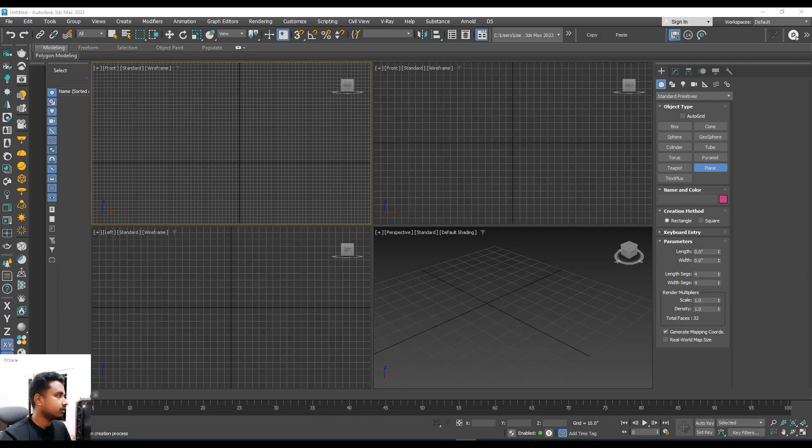How to model this furniture in very short time.

So let's get started. First of all, make a plane. For the reference, go to the reference image and just drag and drop over this plane. Then make it adjust like this. Then it's very important to convert this plane into a real scale.

Maybe your furniture height is 8 feet, so create a rectangle in 8 feet, or you can model this furniture in metric units, so convert this value into metric, mm, cm, or meter. You can do that. I'll go for inch, fps unit. So make it 8 feet, depth is width, and width is 14 inch.

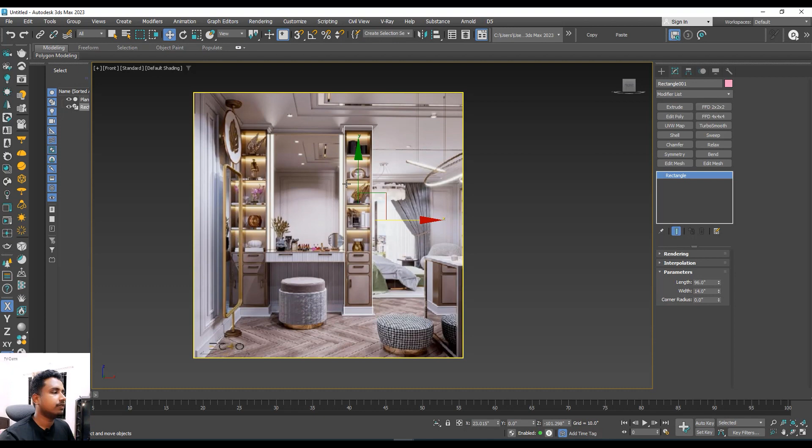And then adjust your plane according to this rectangle. It's very easy, right? Then apply extrude modifier over this rectangle. This value is 14 inch, that's okay. P for perspective, Z for zoom.

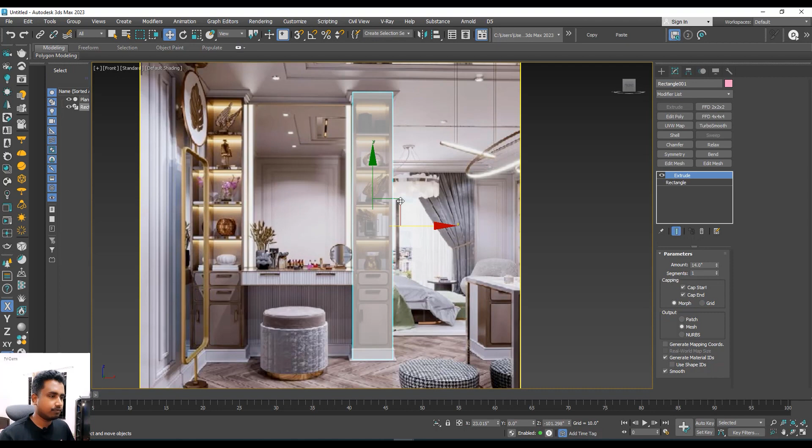Now hold Alt and X, and you will get the transparent mode of this geometry. F for front, and then apply edit poly. You can also apply editable poly, but I prefer edit poly first because you can easily undo if you make any mistake in your model.

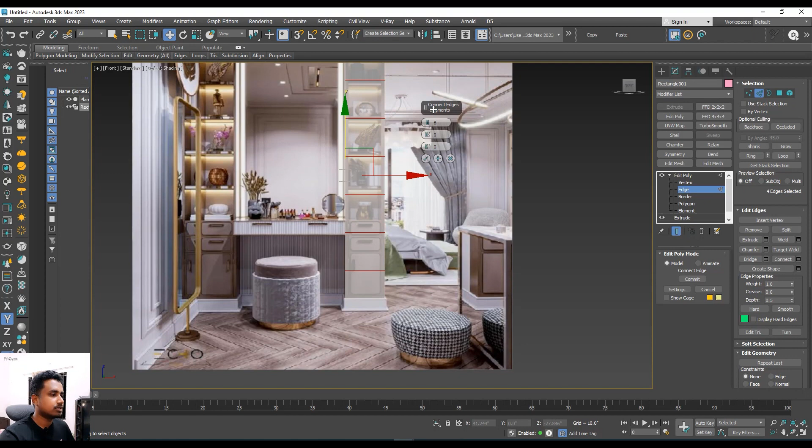Select edges, and here is 1 2 3 4 5 shelf, so you need to connect 5 or 6 connected, and then you will get the 5 segments, and then adjust here and here.

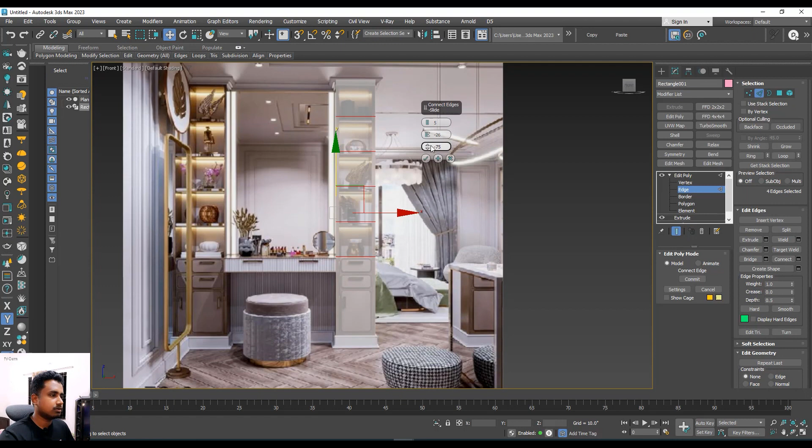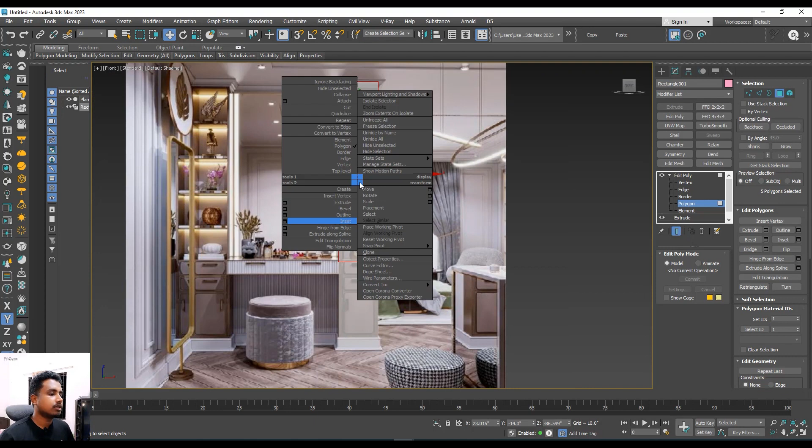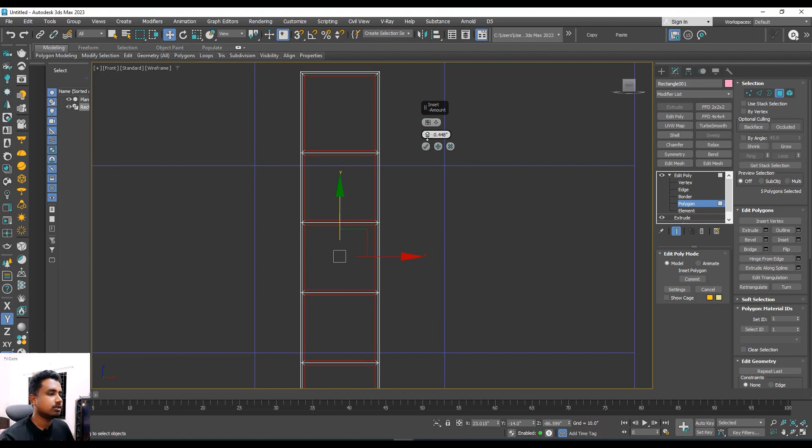Adjust like this. Go to polygon, click F2, and in this way you can get full transparent face. Select full polygon and then inset. First inset for my total border, and another inset for individual shelf. Make sure this is by polygon. F3 to see the proper thickness of your shelf.

This part is 2 drawers and 1 pallet storage. So another edge, connect, make it 1 and increase the segments, like this.

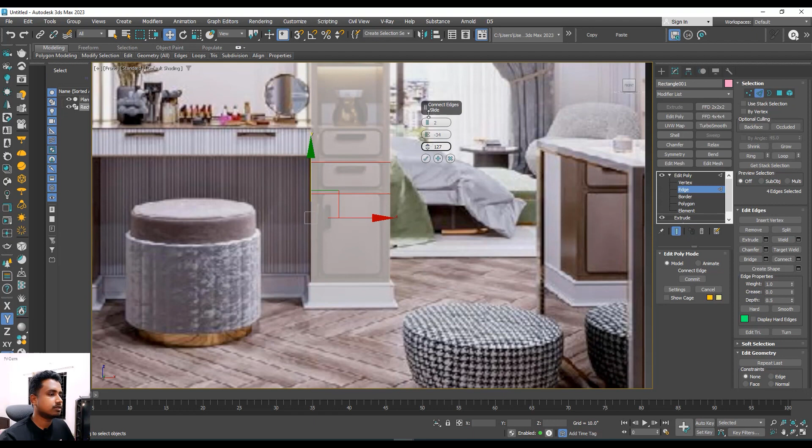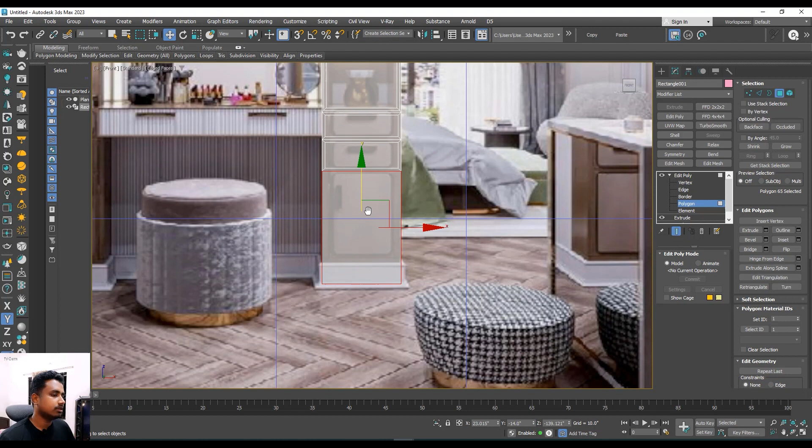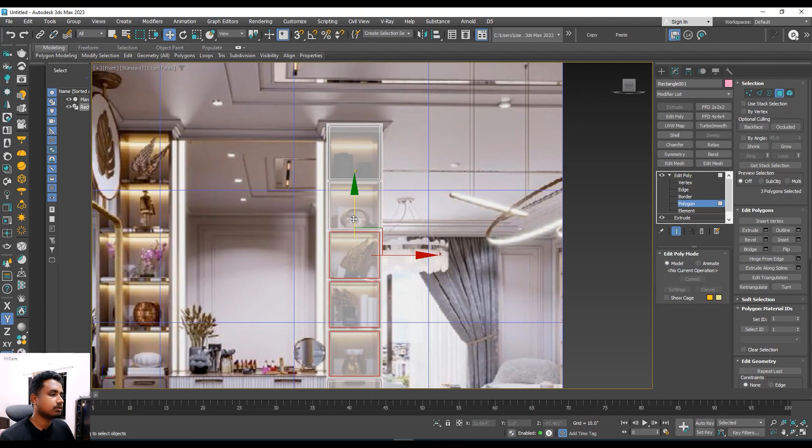F4 for showing the edges. Here is 2 drawers, inset it, this is the drawer part, and then this is another part. So connect, insert over here. Then adjust this by selecting vertex, then select the polygon for this shelf, and hold shift and drag in negative way. Then this part, select the polygon.

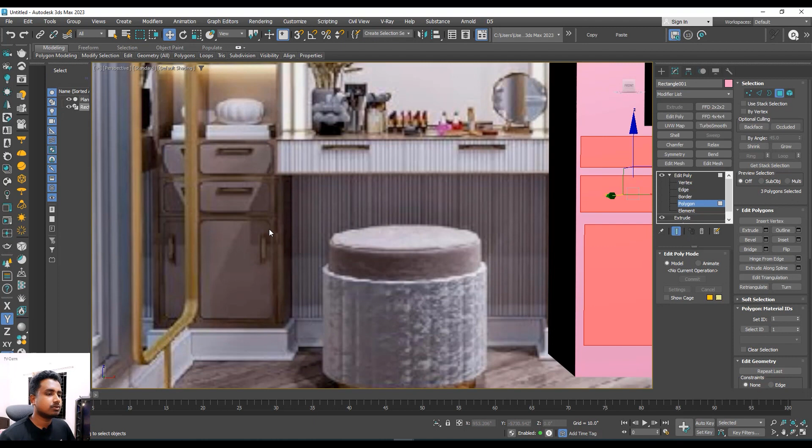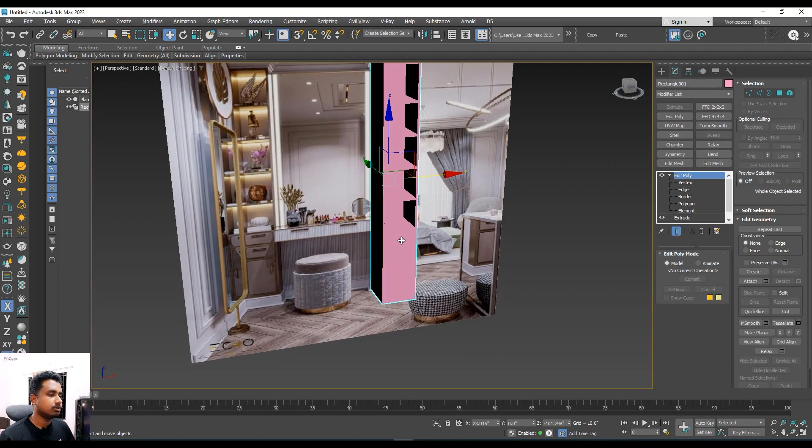And this you can see the round shape. So this is not the total part, this is maybe another bit over here. So we can create it later. First of all, focus on your basic structure. Make it punch like this, and then hold Control Shift and drag like this.

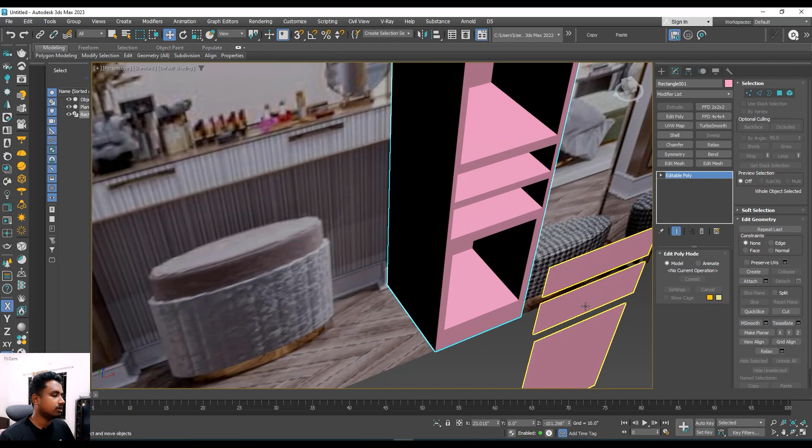Then you will get another face. Make it clone to object, and use shell modifier to give it thickness. Then affect pivot only, center to object, modify, adjust over here.

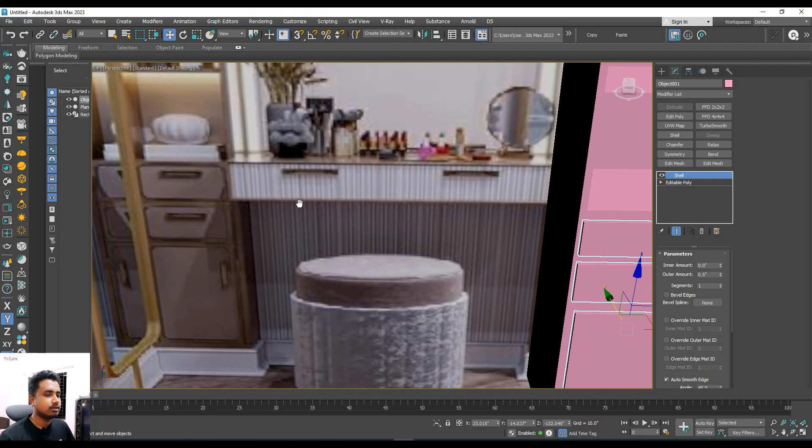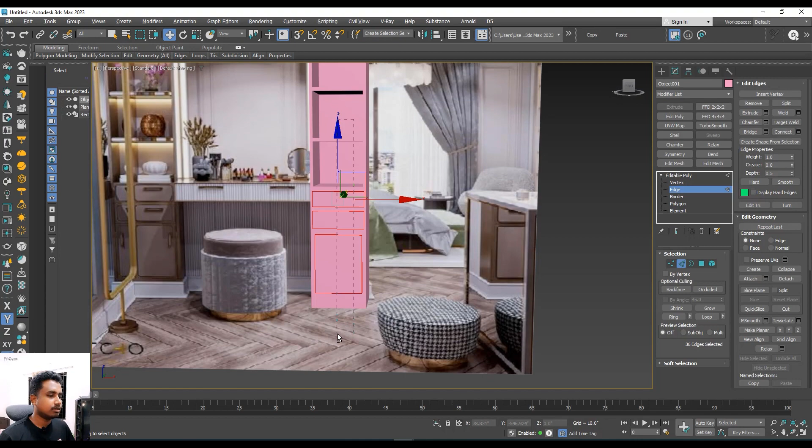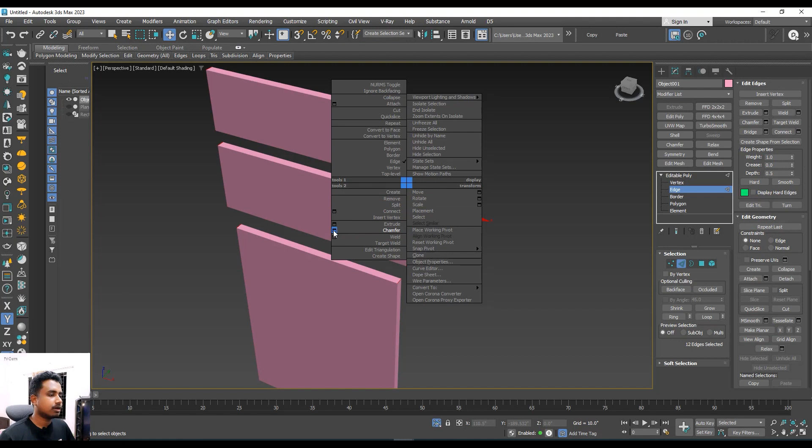Then you can get this kind of shape in a very simple way. Just convert to editable poly, select the edges, this edge, select all side edges, this side and this side, and exclude the middle edges by drag and hold Alt. At the same time exclude the middle part. Just select the corner edges in your drawer and shelf, then left click chamfer, increase some values like this, increase some value, increase some segments. In that way you get a shape like this. Very simple, right?

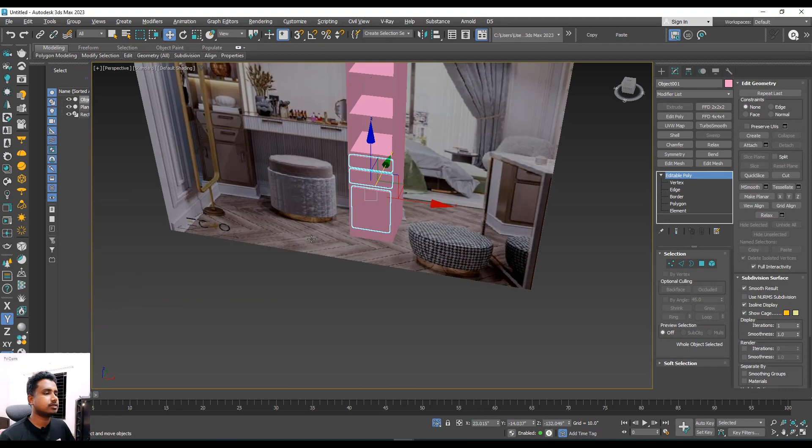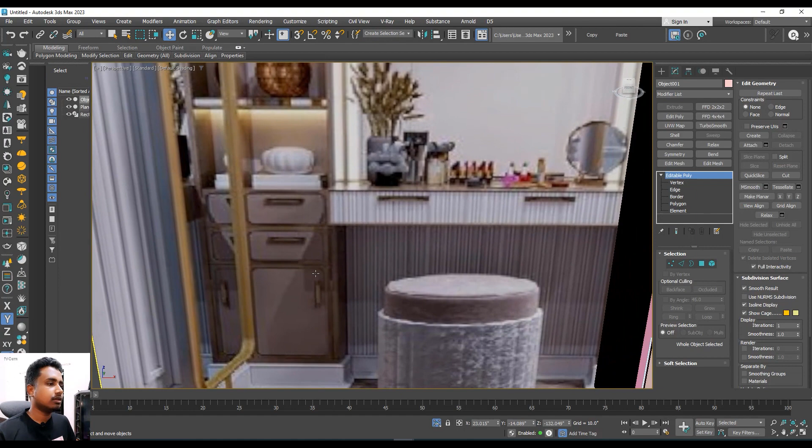So adjust over here, maybe set another color to show it properly. Here you can see in the reference that there is a golden bead over this shelf. So how to create this?

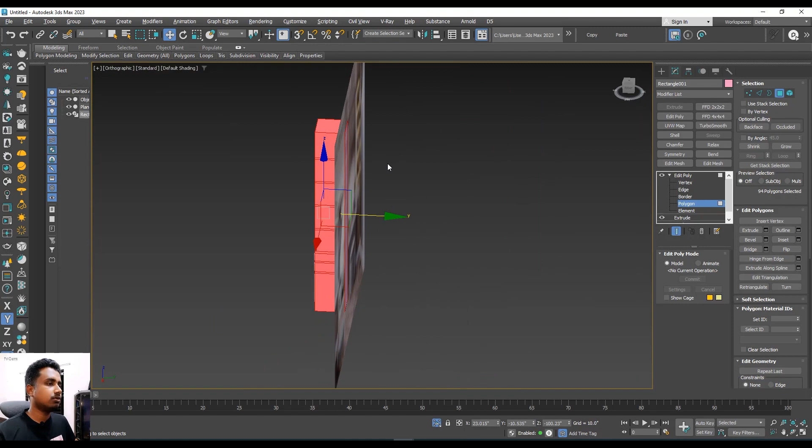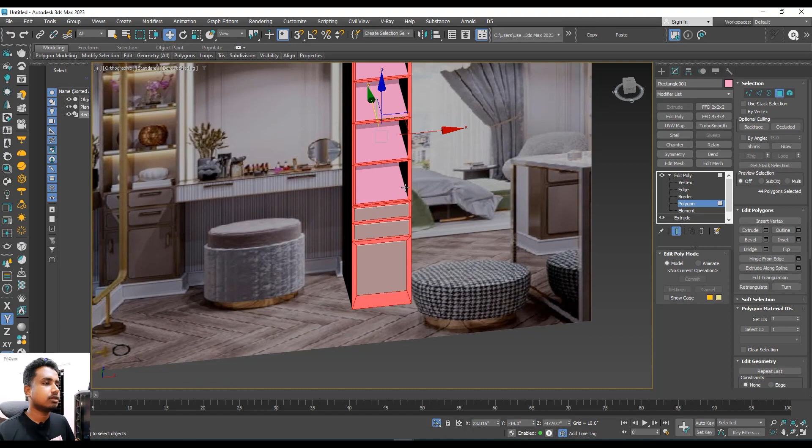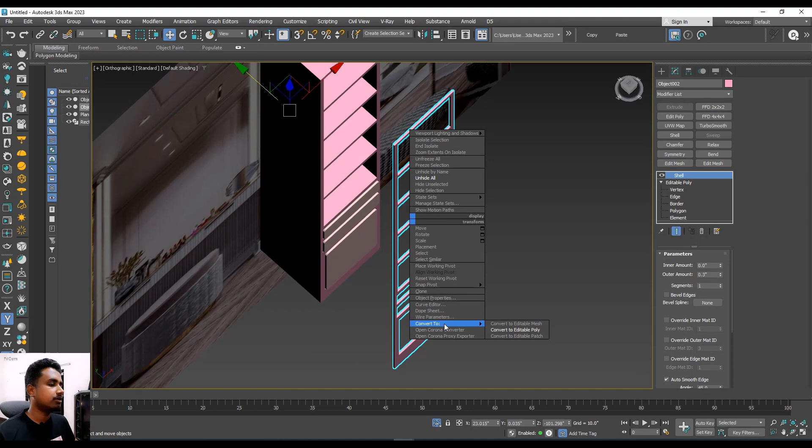Select just the polygon, select it from front, it will be easier, and then exclude this face or this poly. Look, this bead, this golden bead, is just pasted in front of the shelf part. Select that, and then hold Ctrl and Shift and drag in front. In that case you are able to create clone to object. Make it some renderable, go to shell modifier, give some amount, convert to editable poly, affect pivot only, center to object, and paste over here, and that will be our golden bead.

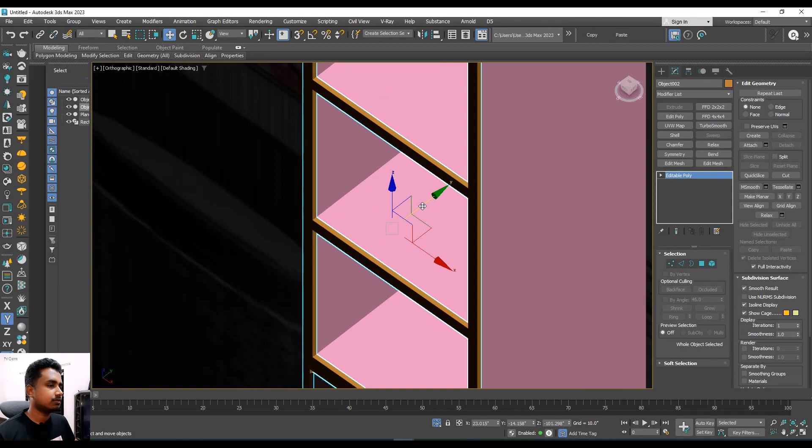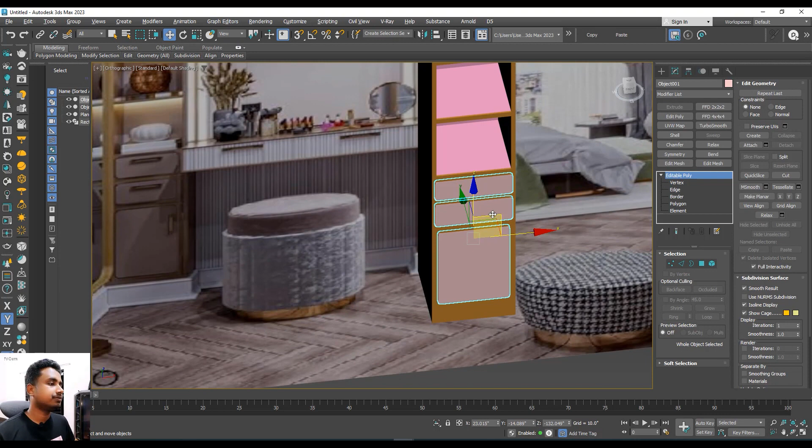Select another color for now, and that will have another shapes in the golden part. So how to create this? Alt Q to hide all except this.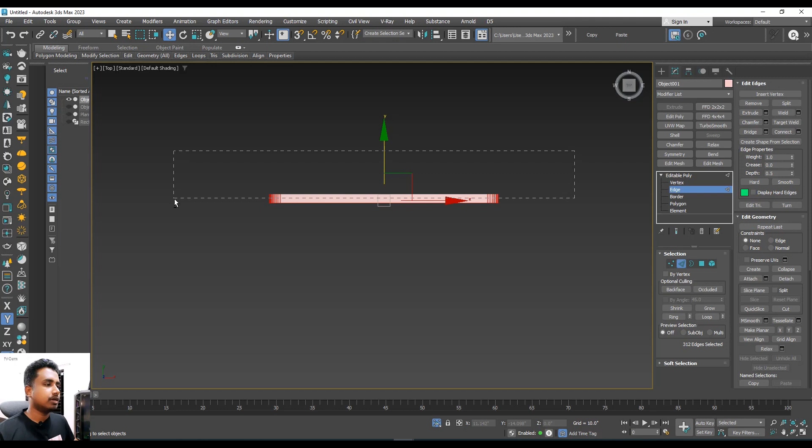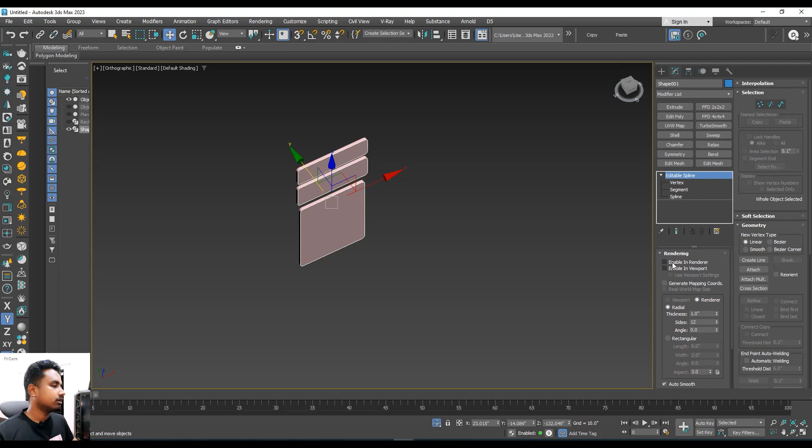Select the edges, go to the top view, select the edges in front and exclude the back edges. Left click, create shape and linear. Then you will get a spline shape from here, and you need to make it renderable. Go to spline, select spline, go to rendering, enable in render, enable in viewport. Decrease some values, unhide all now, and make it golden. Assign the golden-like material. Done. You are able to do the same.

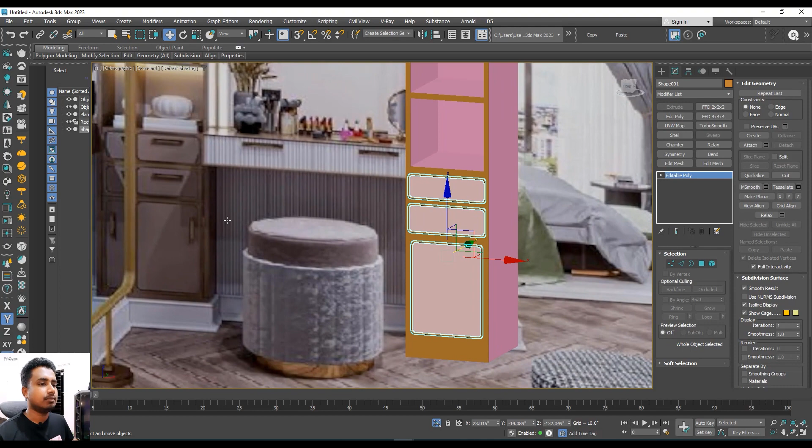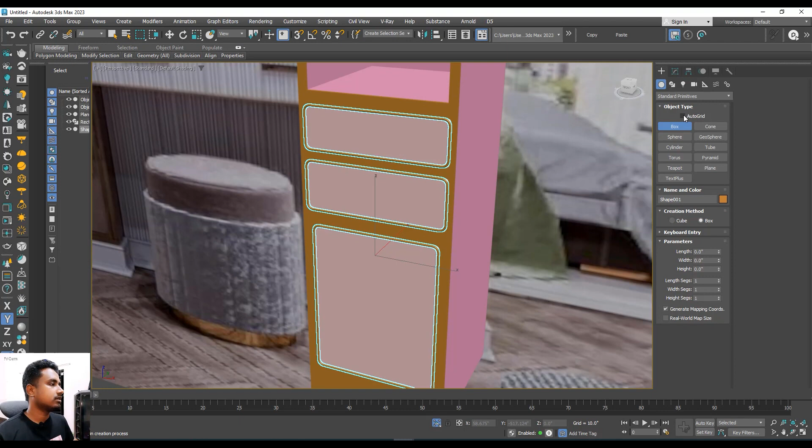So here is the handle. How to create this handle? Maybe you can create it from a rectangle or from a box. So how to create a box over this surface? Activate auto grid and then just drag and give some height.

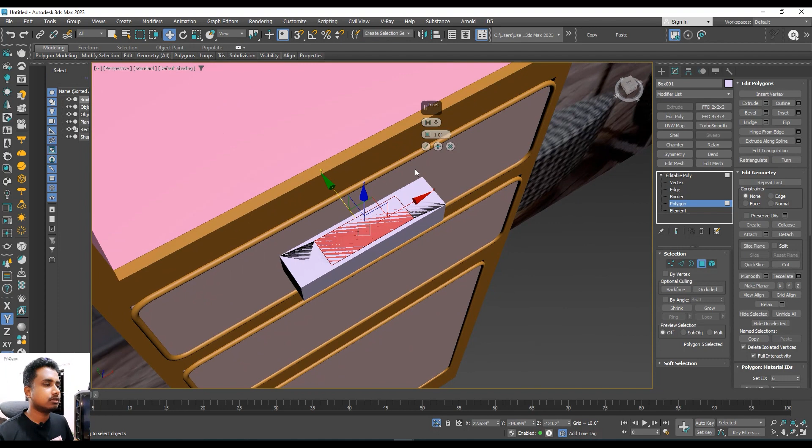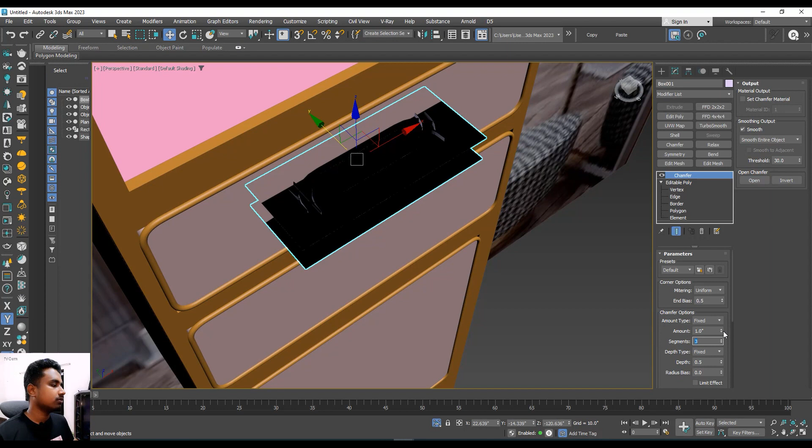Make it convert to editable poly or edit poly, then select the polygon, inset like this, and then punch it, and use chamfer, increase the amount, increase the segment 2 or 3, not much more, and then decrease the amount. Then you will get a smooth handle like this.

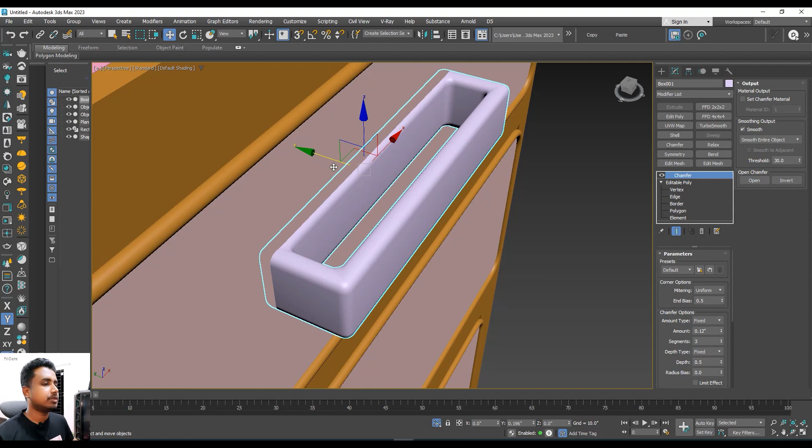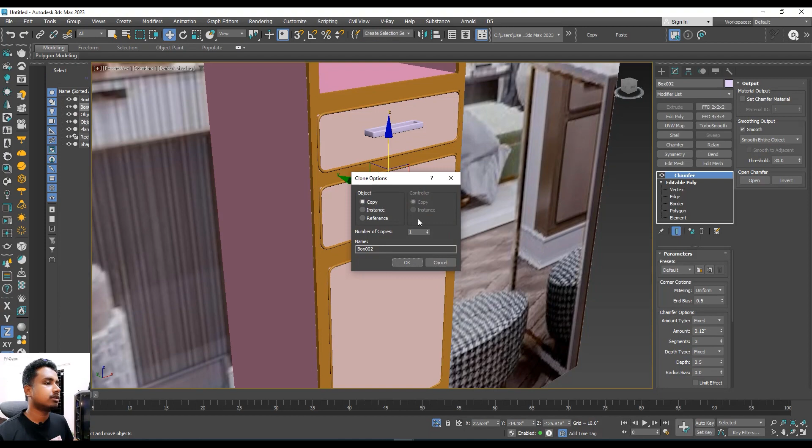Okay, that will be our drawer handle. Just paste it here and decrease some value by using resize. Then instance it in another drawer, and another.

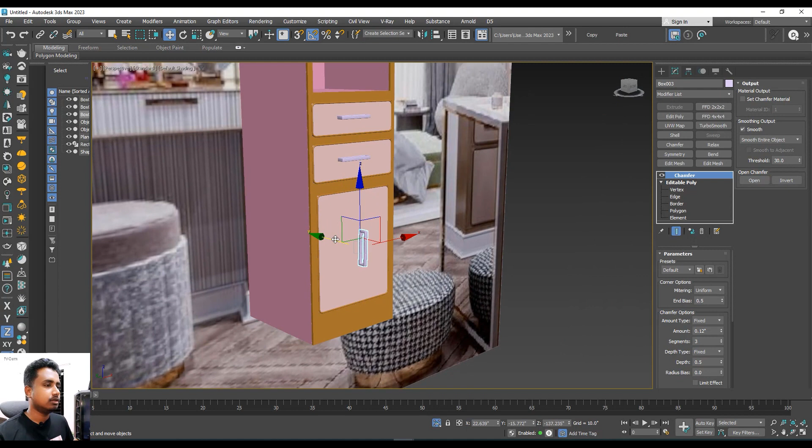This part will be placed in a vertical way, so rotate it, and then adjust in this part. Okay, so this part is almost ready.

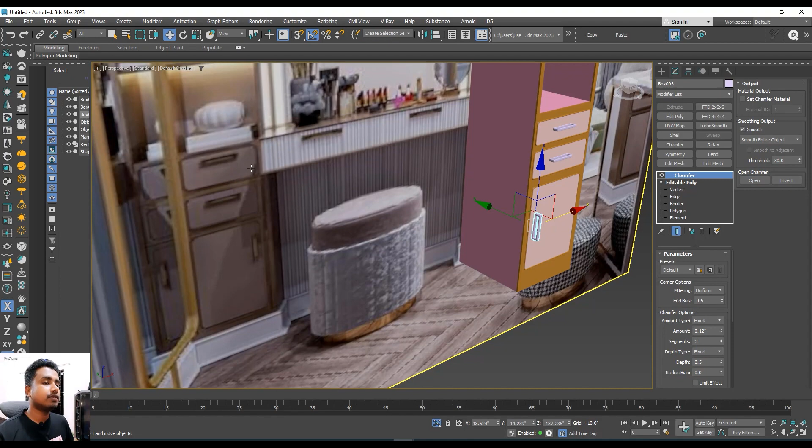As you can see in this image, this drawer has some offset up from this surface. So you can do the same in a very simple way, just up a little bit. Okay.

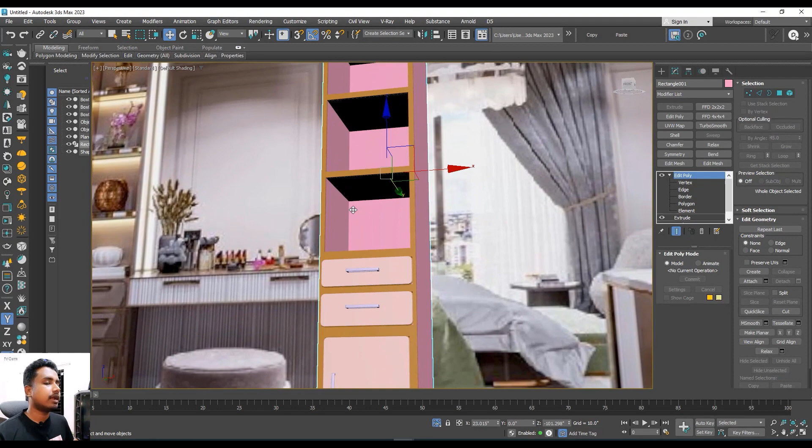Then you can add light over here. Maybe you can add light for light material, or you can use Corona light or Vray light. So maybe we'll adjust light later after completing the full modeling.

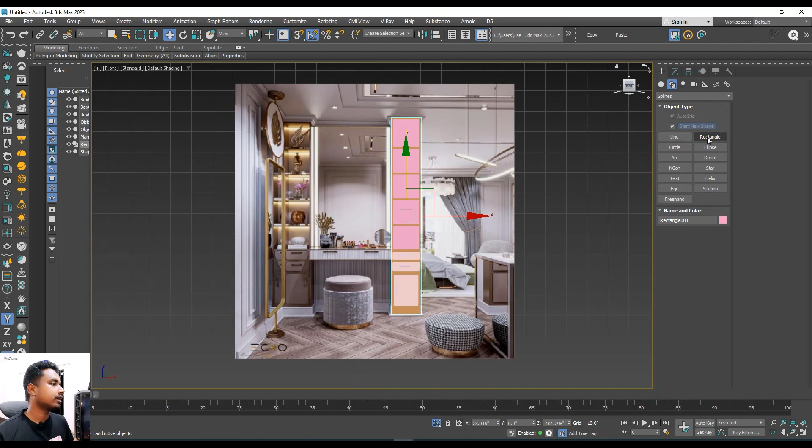So then I'll go for the middle part of this furniture. Again create a rectangle for this mirror part, another rectangle for the bottom part, and then another rectangle for this drawer. Okay.

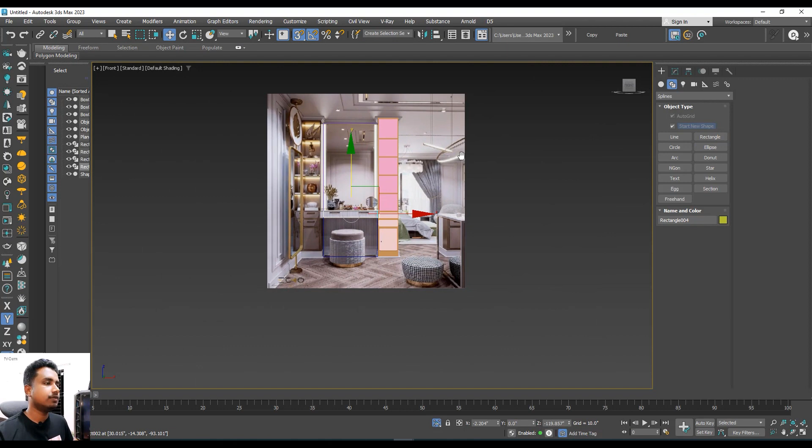Press G to hide the grid, hide the reference for now, and then adjust this rectangle. So you can see the rectangle has thickness enable or enabled, maybe active the enable render and enable viewport. That's why this rectangle is showing like this.

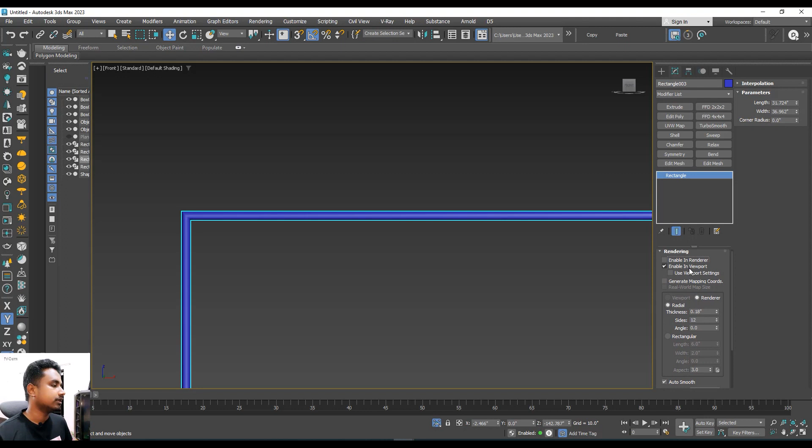So deactivate the enable in render, enable in viewport. Okay. Again do the same, then adjust like this.

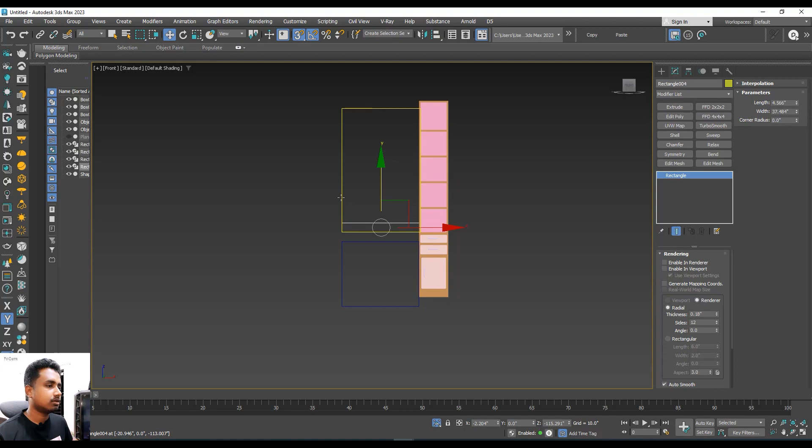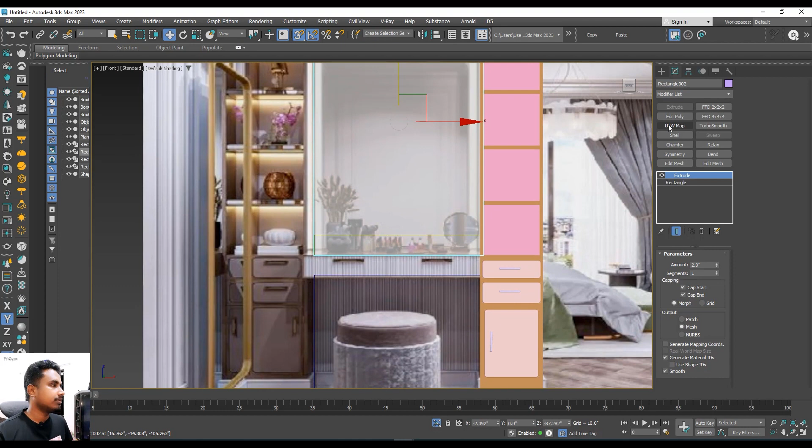So you can extrude it and see the back part. Alt X. This is very low thickness, so give maybe 2 or 3 inches. 2 inches is okay. And then go to the front view. So make it edit poly to adjust for final modeling.

Select vertex and adjust over here. Then do the same in the lower part. Extrude, and make it extrude in the middle drawer part. Extrude. Okay.

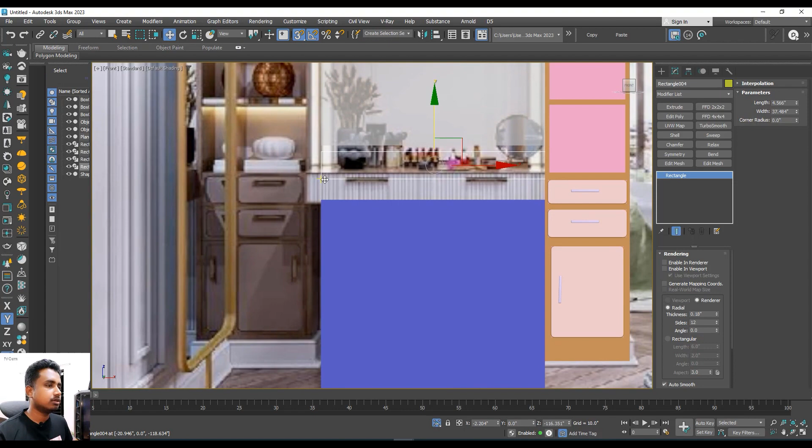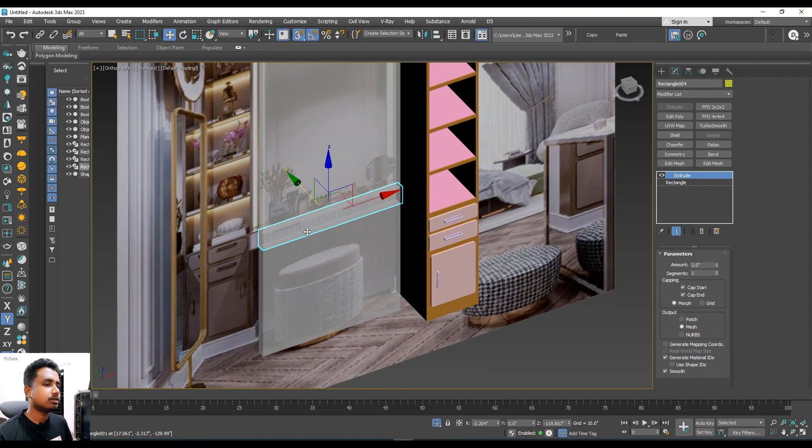So Alt X so that you can see through this object. Here select vertex, adjust over here, and this whole drawer part, this has more thickness around this part. So go to extrude and make it 14, or sorry, make it 14. Okay.

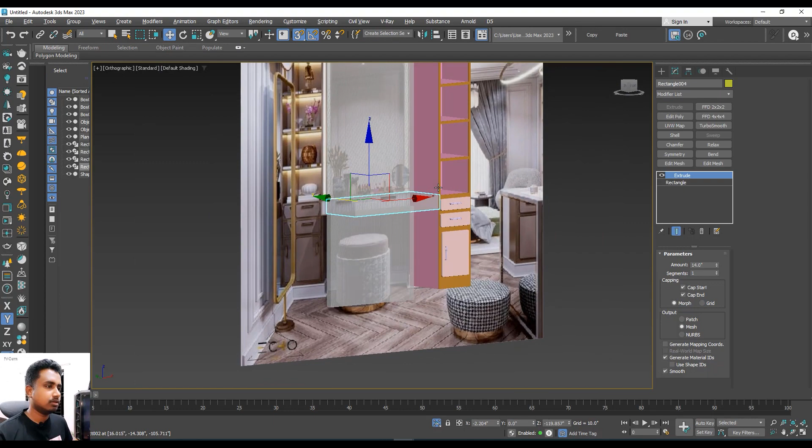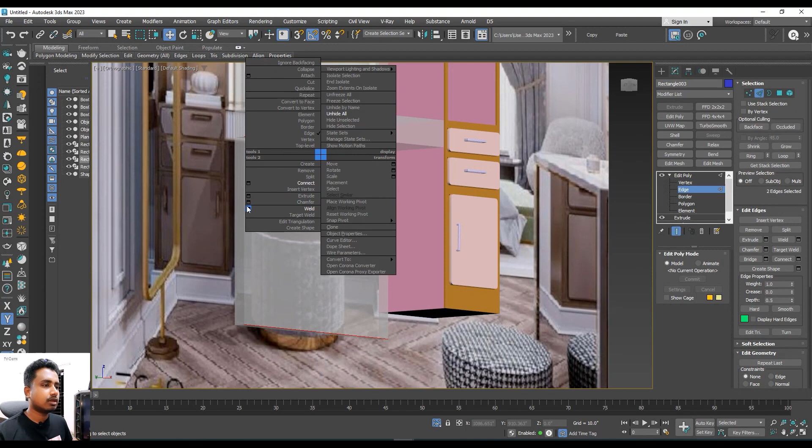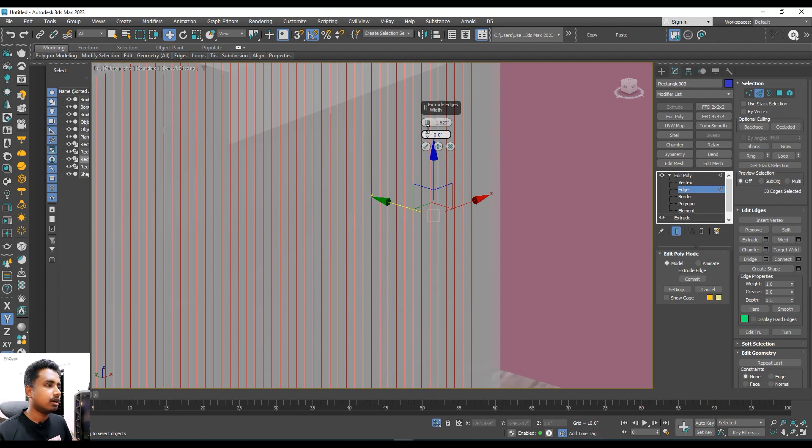And this part, if you see, needs to look like a louver, or needs some groove added over here. So that is very easy. Edit poly, select edges, select this edge and this edge, then connect, increase the connection values, and then make it extrude. So how much extrude you need and how much cutting depth. You need to extrude it in a negative way so that you can create a proper groove over here. Okay, like this.

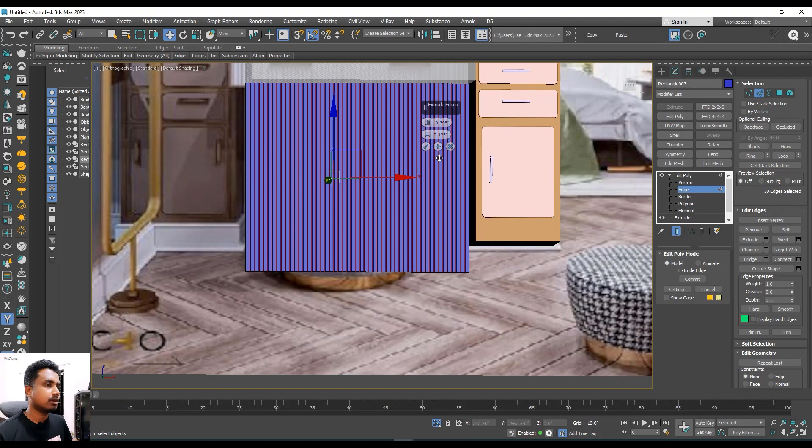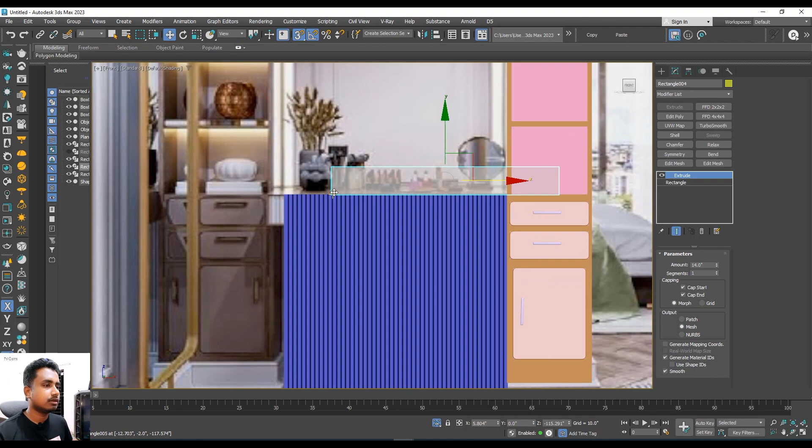You can copy this thing here, copy, and then paste in front of this drawer. No need for another groove, just make it in a very simple way. You can save your time so much.

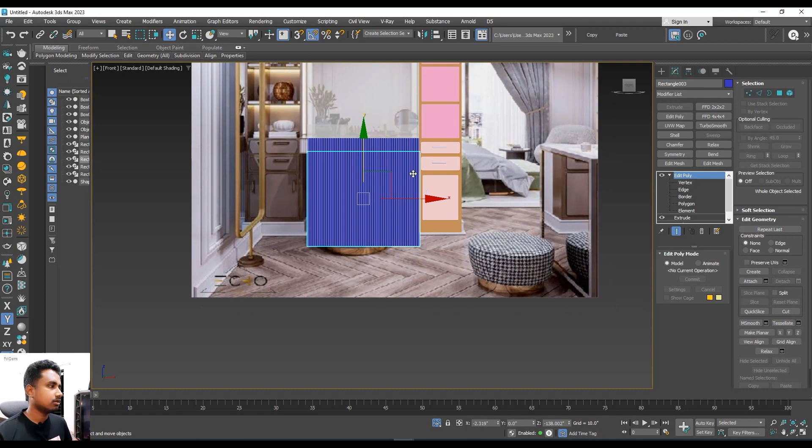Unhide all. So here is the mirror part, here is the drawer part, but you need to paste it in front of this drawer.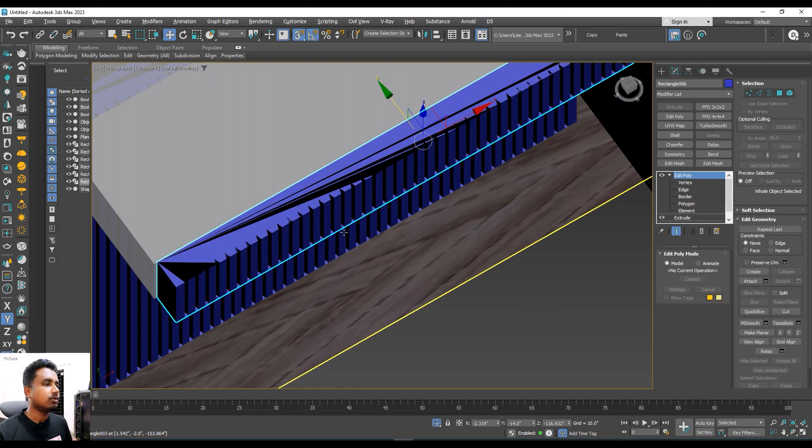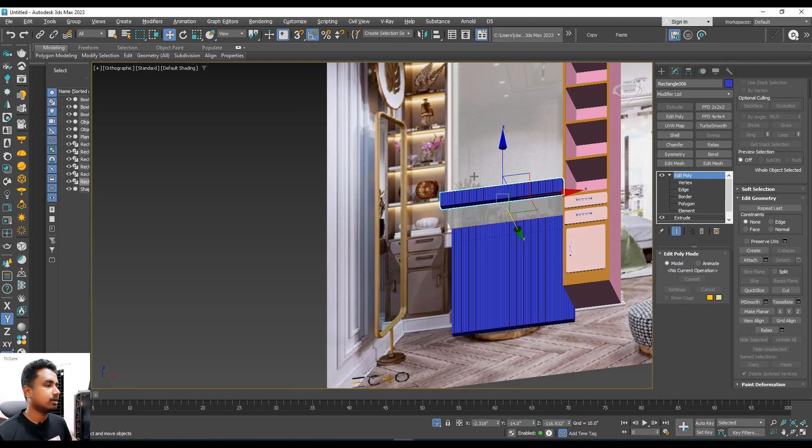As you can see here, it looks very bad, some black lines are here, no worries. Select the element and go to polygon smooth group here, click clear all, and boom, you can see everything is clear. Okay, so give a color over here, maybe white for now.

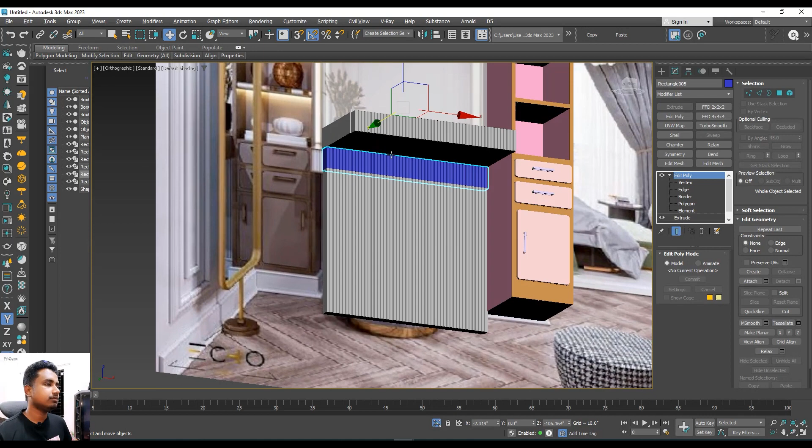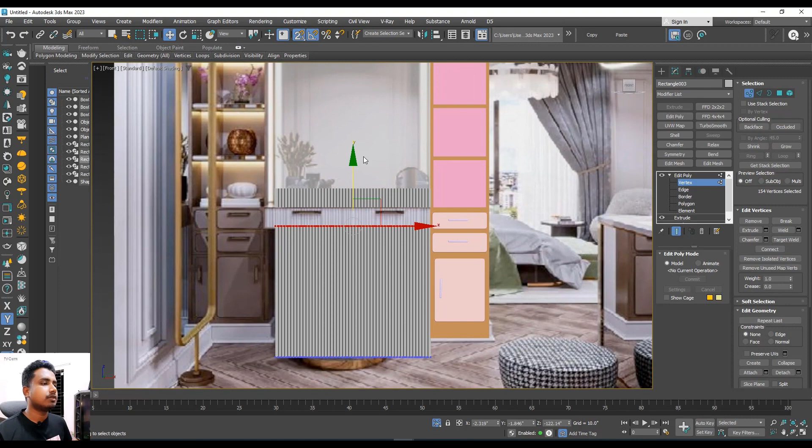So if you work in 2D view, you need to activate 2.5 snap, then adjust.

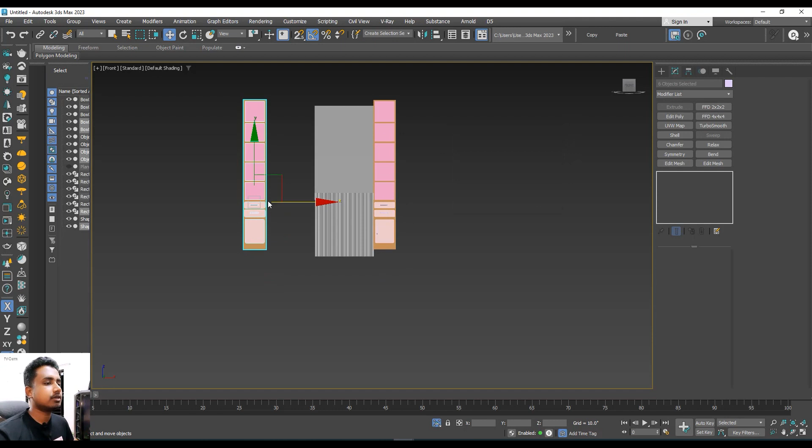No need to copy, don't copy. This is a symmetrical design, this part and this part are the same, so make it instance so that you can change one part and the other part changes at the same time. So make it instance, and then place over here.

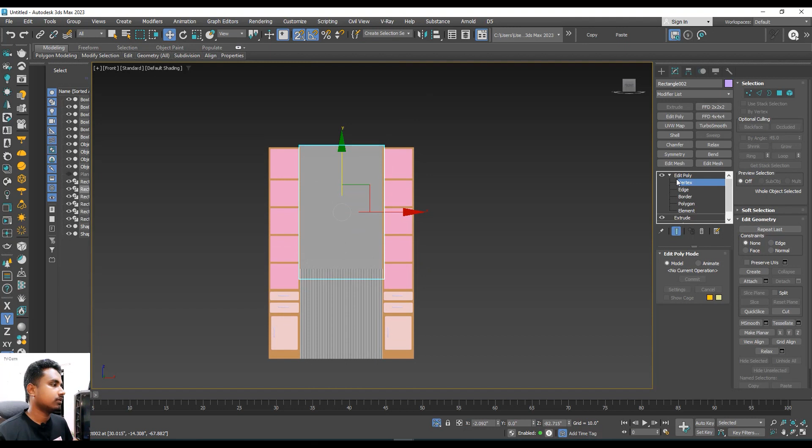Select vertex and okay, that looks very close to our reference. Unhide all, differentiate the plane and compare.

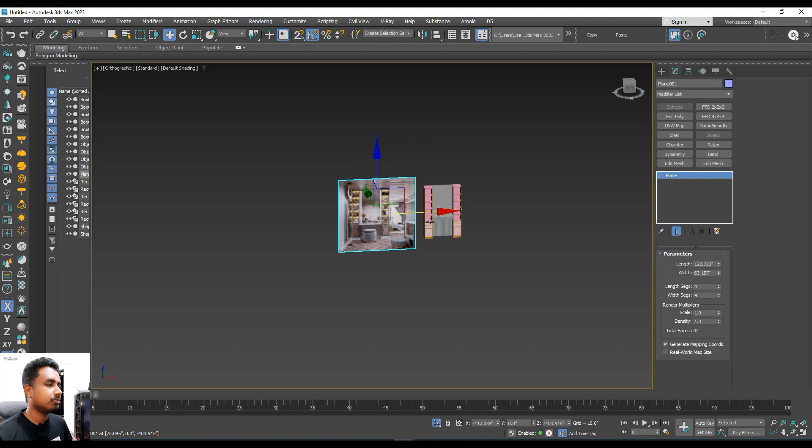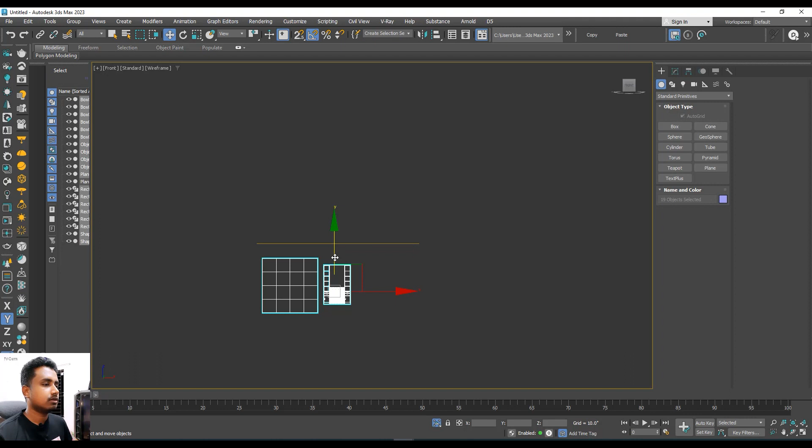Make a plane for the ground. So our model is not at 0 axis, set this model to 0 axis from the Z value. Okay, P for perspective,

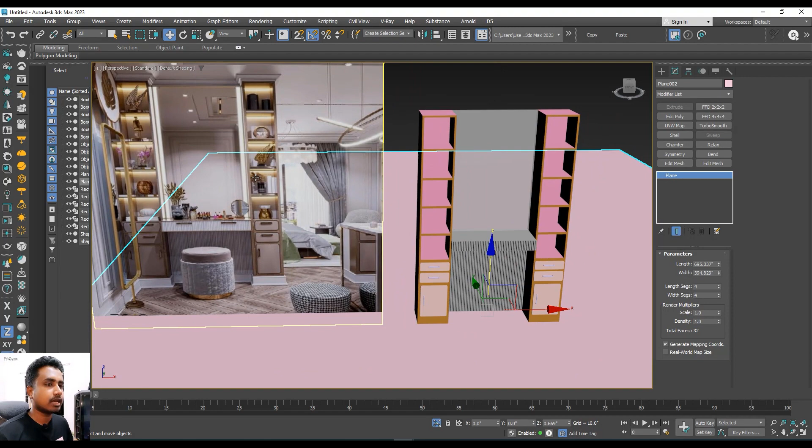give a neutral color here. This way you are creating this kind of furniture in a very simple way.

You need to add a drawer handle over this part. Here is one, and another is one instance.

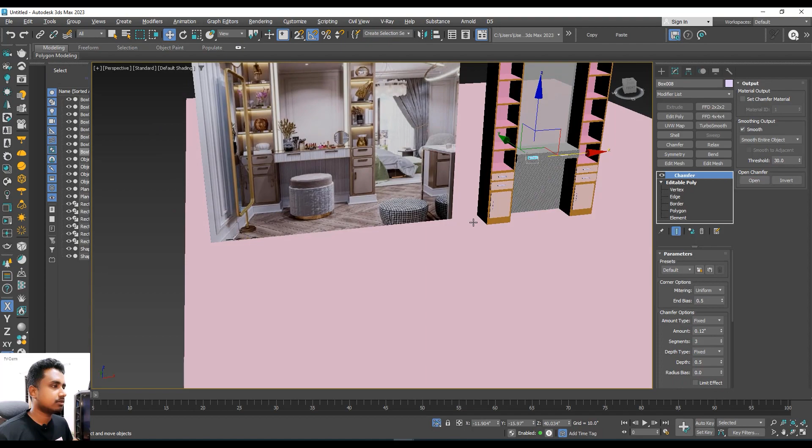Okay, now just need to add the border like this. So how can you do this? You can do it in a very simple way. Make it editable poly, select the polygon, and select the full polygon except the front part.

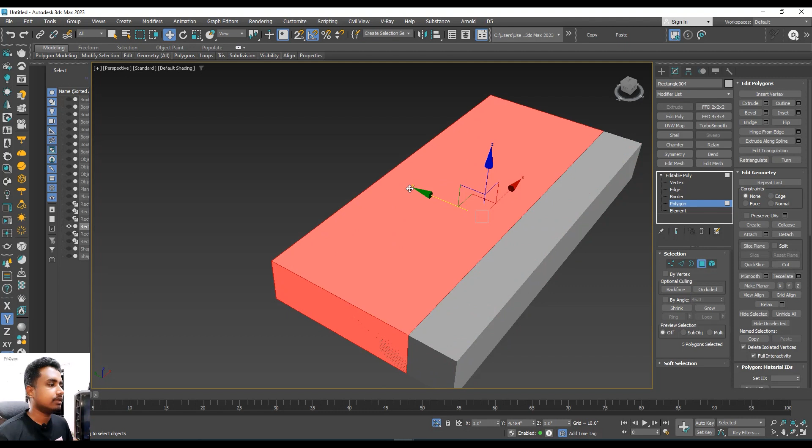Just hold shift and control and then drag it like this and make it clone to object. In that way you can get a frame like this, and then adjust over here, but you need to apply a shell modifier to get more thickness.

Okay, now to adjust the color over here.

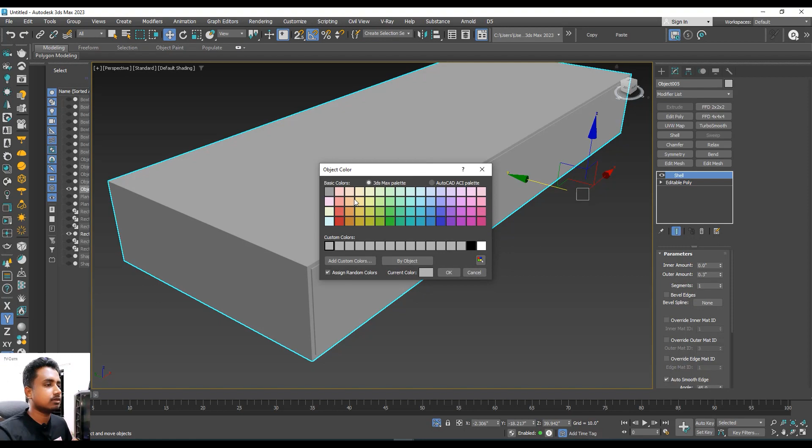Now assign a golden light material, unhide all. Look, this is very close to our reference.

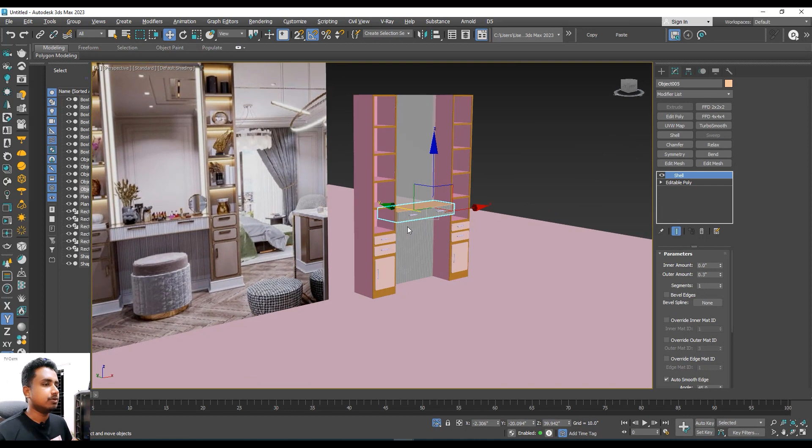Okay, so in this way you can model this furniture. Maybe in the next video we'll try to render this furniture, or maybe we'll put the furniture in an interior space and then render it. We will show you guys how this furniture looks like after rendering. So that's all for now. Thanks for watching.